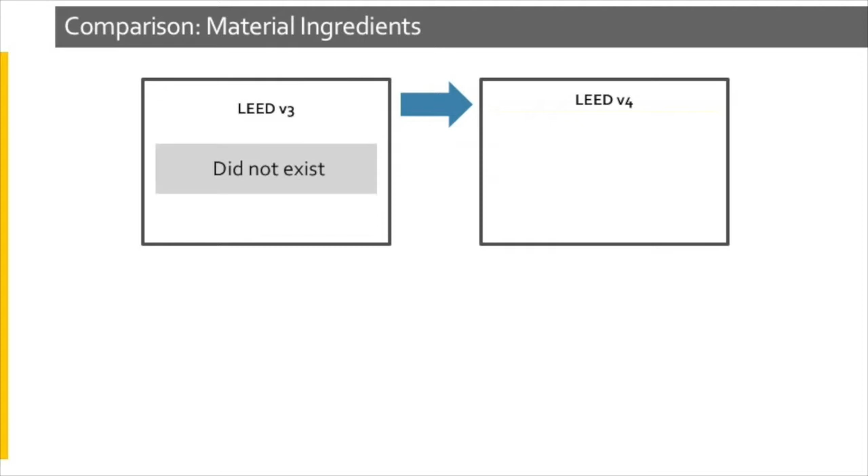The comparison with LEED version 3 is easy because material ingredients didn't exist as a category then. LEED version 4 has a whole new set of criteria, including a list of disclosure paths, identification of material ingredient optimization, and supply chain information.

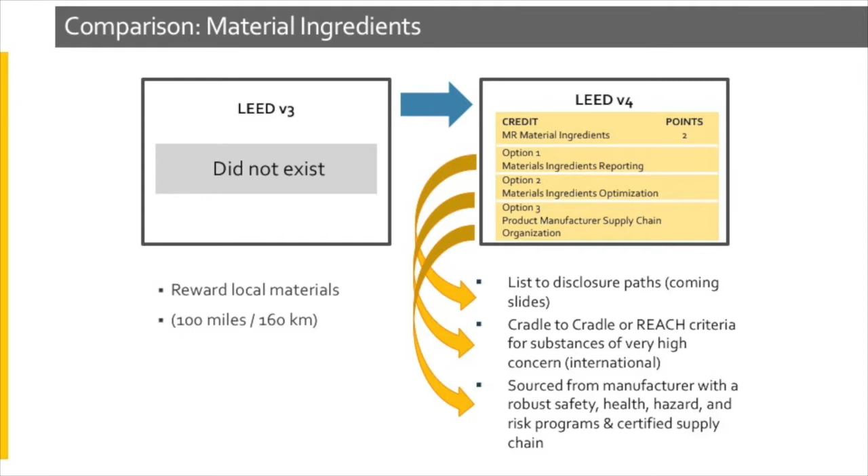One thing to note: in LEED version 3, the regional location of materials was important, within 500 miles of the project. That has gone away as a single attribute. Now the reward for local materials is within 100 miles, much shorter, and it only applies as an extra credit to an already existing credit. It doesn't stand on its own anymore.

Let's talk about the LEED credit for sourcing of raw materials. It has two options. First, using 20 different materials from at least 5 manufacturers that have publicly released a report from their raw material suppliers, including extraction locations and commitments for impact reduction. Frankly, I'm not sure anyone is doing that at this moment. We don't have that information for our products, and option 2 has been more popular.

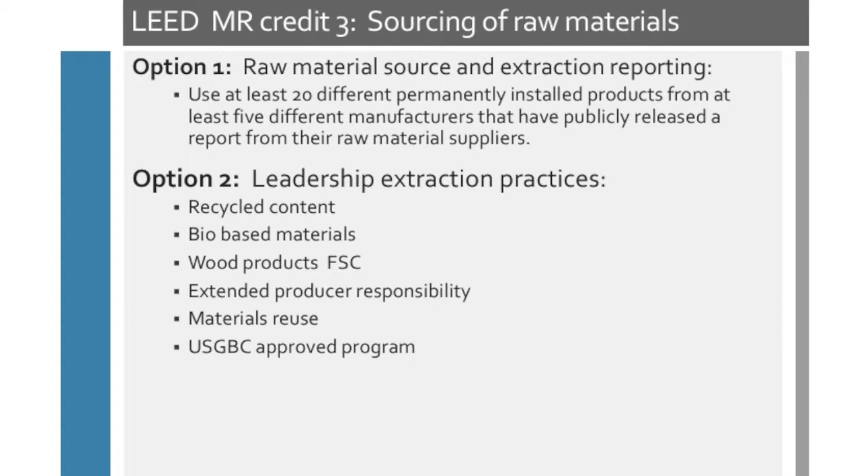Option 2 continues to identify individual attributes for products: recycled content, bio-based materials, FSC certification for wood products, extended producer responsibility, and materials reuse. This is also an area where USGBC can approve new pathways. And this is where local materials within 100 miles can add extra credit for products that already have an attribute such as recycled content.

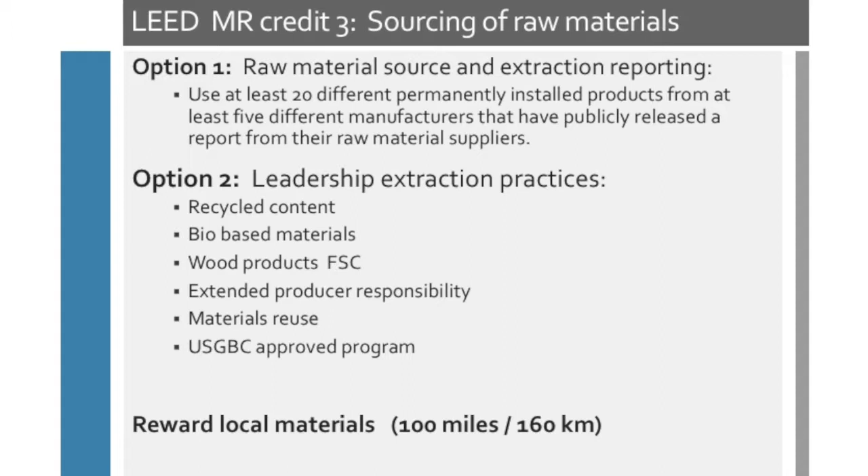Option 2 is the credit area more popularly used at this moment. Third-party certification is important to identify both post-consumer and pre-consumer numerical information on how much recycled content is in the product. For Owens Corning, we use two different certification bodies: for all our fiberglass insulation and foam insulation, we use SCS Global Services; for our Thermafiber or mineral wool insulation, we use ICC-ES.

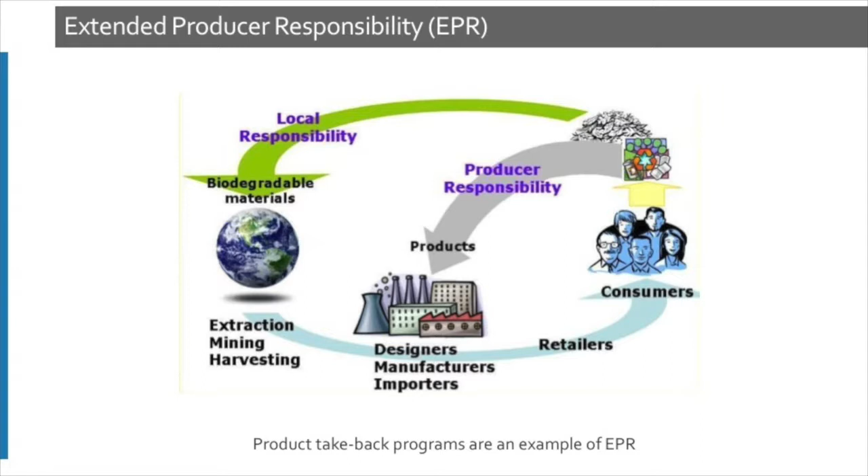Let's talk about extended producer responsibility. The idea is that the producer of a product would take back that product at the end of its useful life. You may get questions about whether that's possible for Owens Corning products. At this moment, we don't have a take-back program for any of our products, but this might be typical for ceiling tiles or some carpet products.

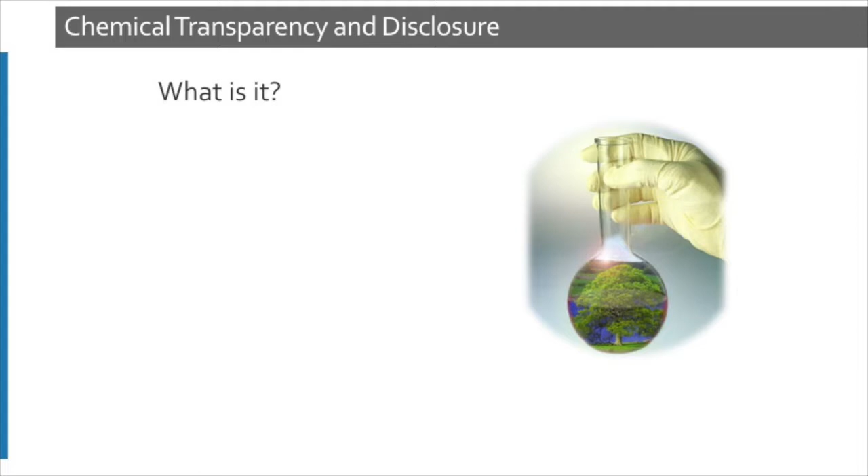Chemical transparency and disclosure is an important new attribute in LEED version 4, and it's really part of the strategy of looking at human health impact: understanding what materials are in products, their hazards, and the hazards associated with individual ingredients, but also the question of exposure and risk still to be addressed.

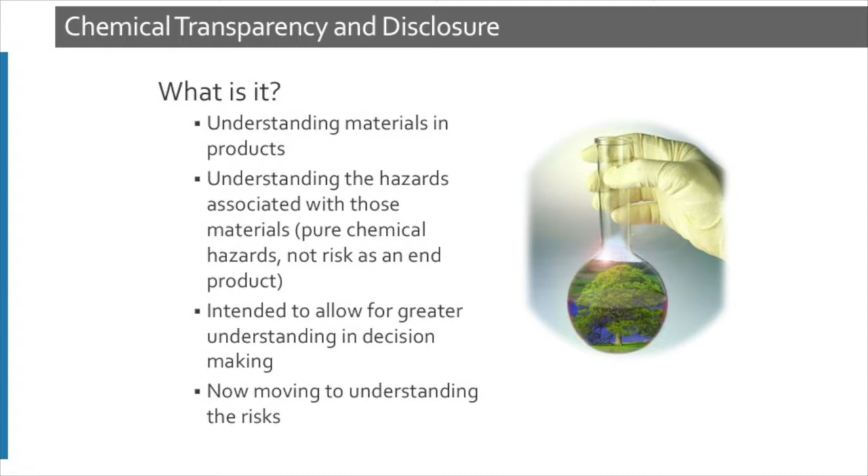There's an intention to allow for greater understanding of what material selections are being made and decision-making around that. We also need to understand more of the risks and exposures, because you can have a chemical in a product that has a hazard on its own, but in the process of making the final product it renders that non-hazardous, since no exposure is made to the occupants.

The LEED version 4 credit for product disclosures and optimization under material ingredients looks at 20 different permanently installed products from at least 5 manufacturers that use any of several programs to characterize their products around material ingredient disclosure. It could be a simple manufacturer inventory, or a Health Product Declaration - one of the first pathways, where architects were asking for HPDs.

The next pathway is Cradle to Cradle certified at version 2 basic or version 3 bronze level. New in 2016, they added more pathways: the Declare label evaluated down to 1,000 ppm, the ANSI BIFMA standard for furniture, and the Cradle to Cradle Material Health Certificate at least at the bronze level, where 90% of materials are assessed by weight.

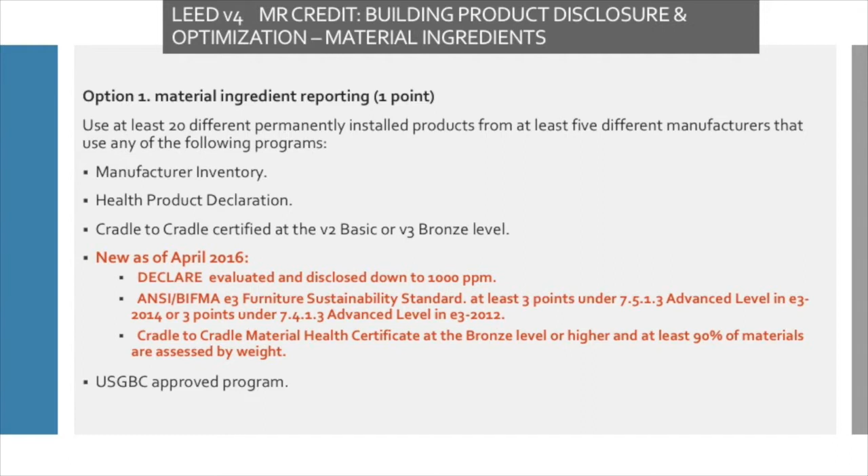Owens Corning has chosen to assess their products according to the Cradle to Cradle Material Health Assessment. We chose this because not only are the hazards identified for any ingredients in the products, but the product is also assessed for risk and exposure, and that's provided in a color-coded mechanism to communicate that information to the architect.

The color-coded scheme identifies what materials are considered ready for optimization, meaning we should try to find substitutions, or are fully optimized and need no further work.

This shows the Material Health Certificate from Cradle to Cradle. You can find that on their website, or on our website with the architectural and design information. The Human Health Impact certification goes from bronze to platinum level.

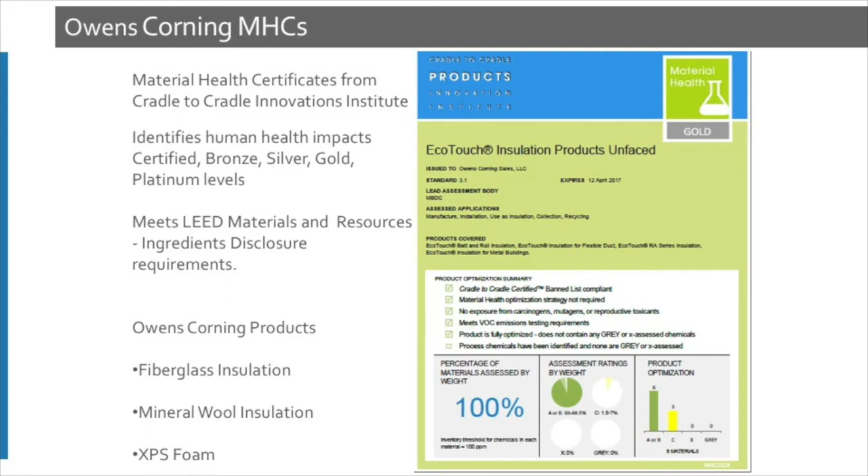This shows our EcoTouch insulation product, rated at the gold level. You can see most ingredients are in the green pie at the bottom of the page, and check marks identify the assessment ratings for that product. This is an easy way to identify and characterize our products, and we have these material health certificates for our fiberglass insulation, mineral wool insulation, and XPS foam.

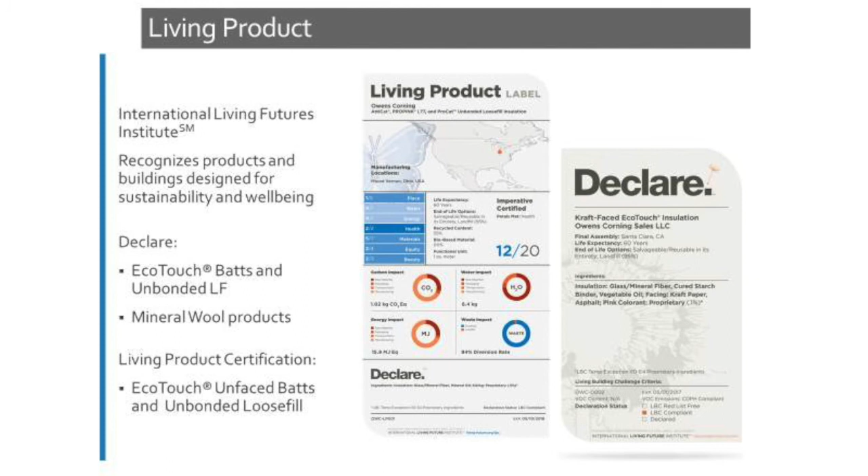Additionally, our EcoTouch batts, unfaced batts, and unbonded loose fill have achieved the Living Product Challenge certification through the International Living Futures Institute. This group has the Living Building Challenge Green Building Program, which is a step above the requirements for LEED version 4. We also have Declare labels for those products, and all of this information would be sent in any information package, even for the LEED program.

That ends session 4. Next time we'll be talking about the last credit of Indoor Environmental Quality, which will touch on low emitting materials and acoustics. I hope you join me for that session.